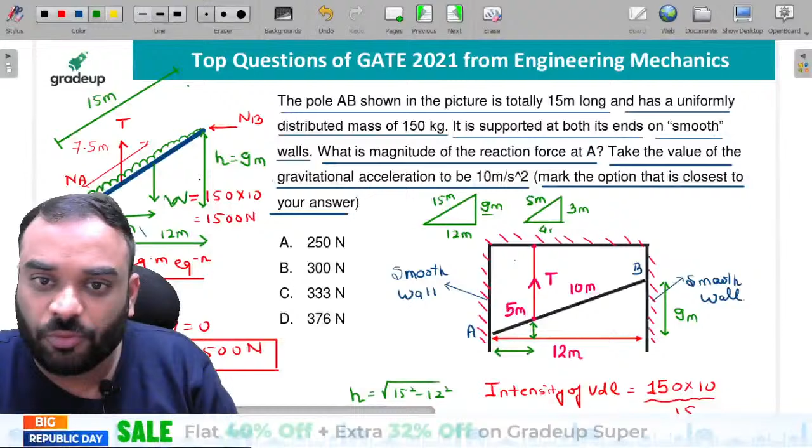If you divide all the values by 3, then you will get the value. Just divide this 15 meter by 3, so you will get 5 meter over here. If you divide this particular value by 3, then we will get 3 meter over here, and at this particular point we will get 4 meter. So it is nothing, this one is 3 meter and this one is 4 meter.

Now we know that this particular distance is equal to how much? This particular distance is equal to 4 meter, and this one is 3 meter.

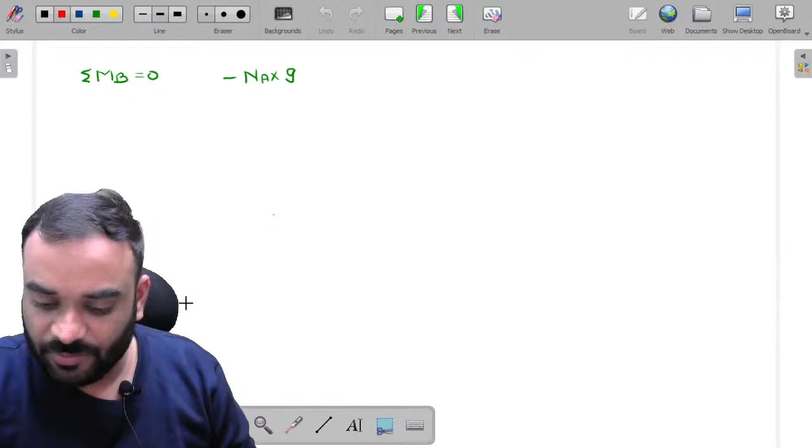Now let's write the equation of summation MB is equal to 0. Good evening Varsha, how are you? Come on in. Shashwat is saying it will be D. Let's see how it will be D, Shashwat.

So guys, we have to take the summation moment at B equal to 0, right? Summation moment at B is equal to 0. So NA into 9, then T into how much? We have to calculate this distance.

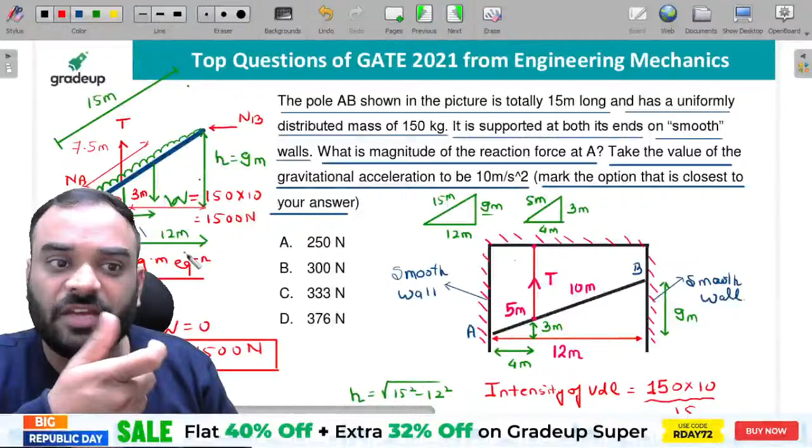This one is 4, and the total is 12, then remaining one is how much? It is 8 meter, guys. Your total distance is 12 meter, this one is 4 meter, so remaining is equal to 8 meters. So can I write it, guys? It is plus T into 8 meter minus.

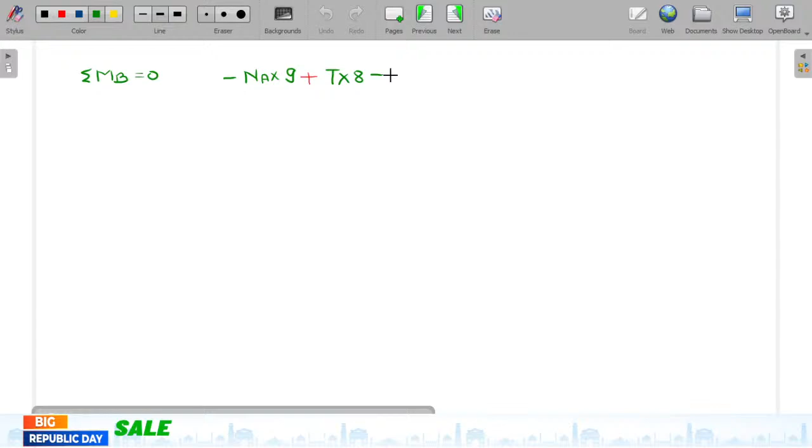Now your self weight of this particular rod is to be applied in the downward direction, and it is trying to move in anti-clockwise direction, guys. So this particular distance is equal to how much? It is exactly 6 meter in terms of horizontal, right? So can I write it, guys? T into 8 minus W into 6, and it should be equal to 0.

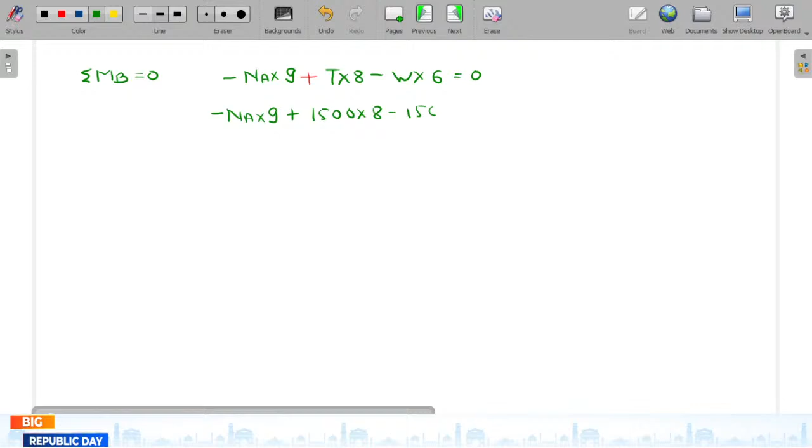So guys, can I write it? Minus of NA into 9 plus, what is the value of T? It is equal to 1500. So 1500 into 8 minus again 1500 into 6, and it's equal to how much? 0. So can I write it? NA is equal to how much, guys? Calculate NA, you will get the answer.

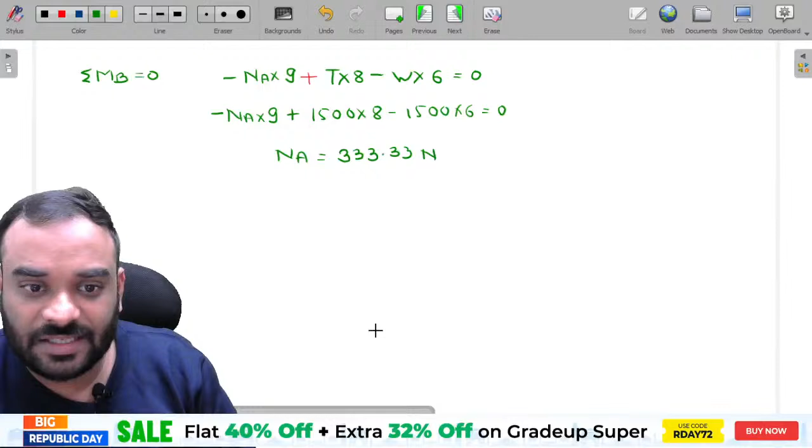So guys, we are getting a value of 333.33 Newton, and this is the answer, which is nothing but our normal reaction at support A. This reaction is found at A, so C is the correct answer, and it is a very beautiful question, guys. It may be asked in your GATE examination. It was a great question. Tell me, guys, yes or no?

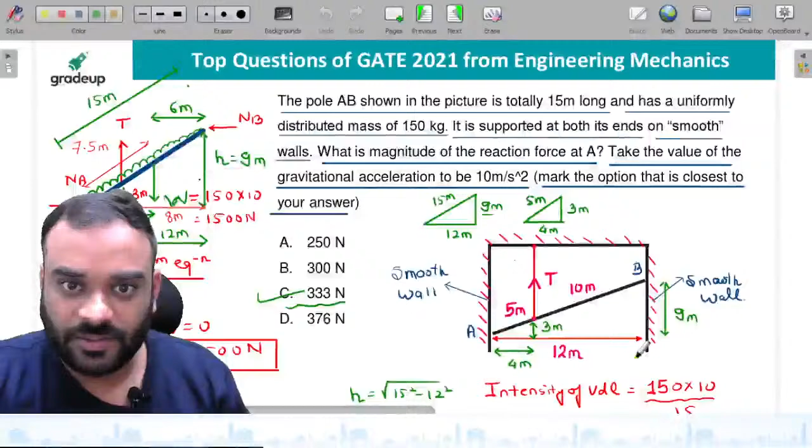Okay Shubhajit, wait a minute, let me show you, no problem guys. You can see here.

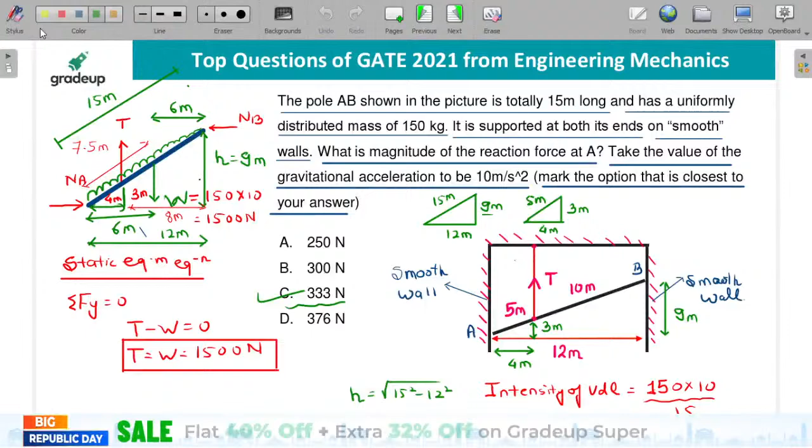This is the complete solution over here. Next page, this one.

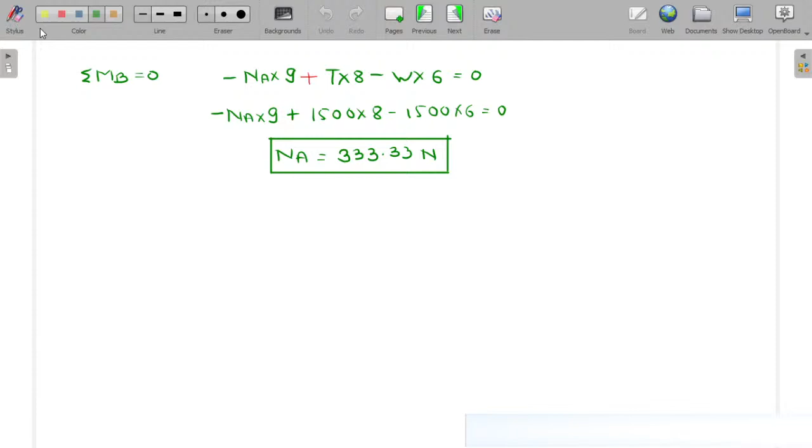Okay guys, so let's move to the next question. This is the next question which we have to solve. So it is given to us, guys.

This one is equal to how much? It is equal to 4 centimeter. What is given to us? It is equal to 4 centimeter, this one is 4 centimeter. And this is the hammer which is placed against this particular block to pull out this particular nail.

To pull out this particular nail which is embedded into this particular surface. Okay sir, now there is one force, guys, which is to be applied in this manner, which is 200, and the distance of this particular contact surface with this particular force is equal to 20 centimeter, and this distance is equal to 5 centimeter.

Now what they are asking, guys, is the tension in the nail, and you have to enter a numeric value in Newton. This is a very beautiful question which is a one liner question. It may be asked for 1 mark. So tell me the answer, guys, for this one.

Just solve it by yourself. I'm giving you sufficient time, guys, and it is a very, very beautiful question. Just try it.

And again, guys, this is nothing but your problem which is based on the static condition itself, and it is a numerical answer type problem. You have to just find the tension which is to be developed in the nail.

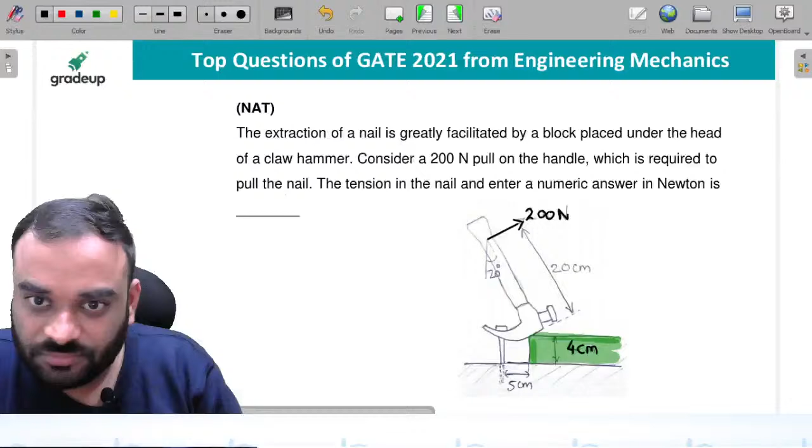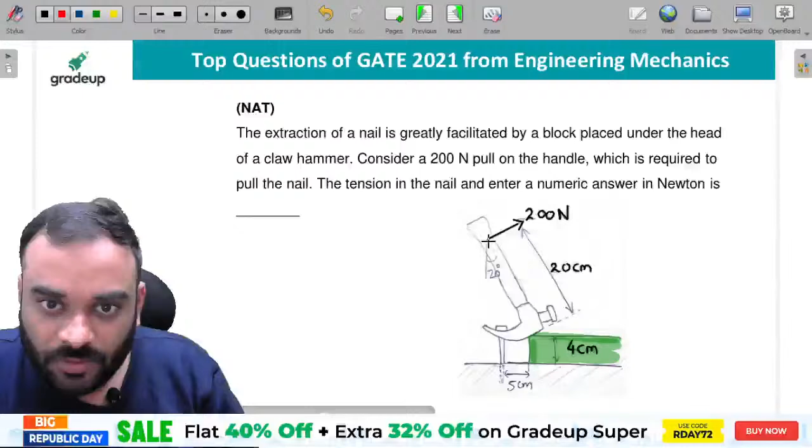It is 200 Newton. It is 200 Newton. This one is 20 centimeter. This particular angle with respect to this particular axis, this one axis, guys, this angle is 20 degree over here. How much is this angle? 20 degree. This one is equal to 20 degree.

Okay sir, now this particular distance is equal to 5 centimeter. How much is this? 5 centimeter. Now is it clear? Can you see it now?

So just solve it, guys, and tell me the answer, because it is a different kind of question which is based on the static condition. Just you have to apply the static equilibrium equation over here to answer this question.

Okay guys, now this is the figure in which we have to find out the tension force over here. Now you can see here guys, this is the tension which is applied in the downward direction, because you're trying to pull out this particular nail, so your nail is trying to give a tension force in the downward direction.

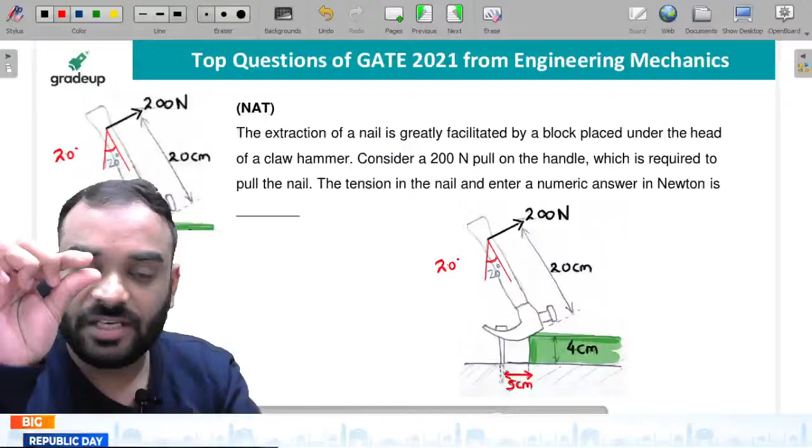Why is it so? Because of the friction which is present between the nail and the surface in which this particular nail is embedded. So guys, it is trying to give a tension force in the downward direction, because we are considering this nail and the hammer as a single object.

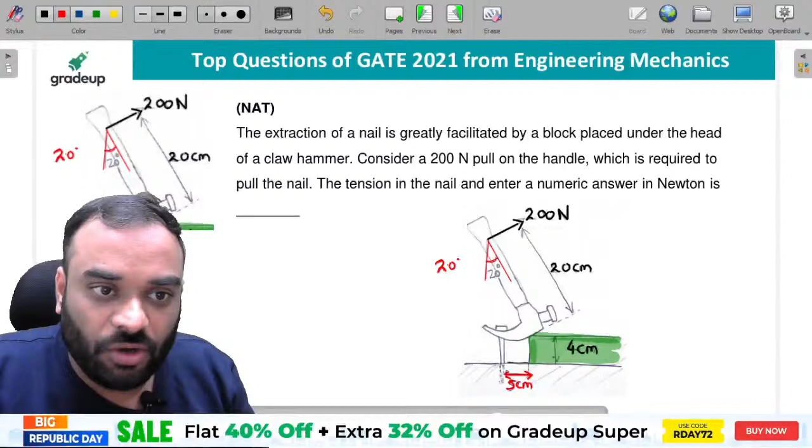Okay sir, so this one is what? This one is tension force guys. This one is tension force. And the distance of this particular force from this point of contact is equal to 5 centimeter.

Ye kitna distance hai baccha? This is equal to 5 centimeter. This one is equal to 5 centimeter. And this distance is equal to how much? 20 centimeter. Now guys, we can take the summation of moment about this point, which is nothing as, let us suppose this is our point A.

So can I say that, guys, the summation of moment about point A is equal to how much? It is equal to 0. So can I write it? It is 200 into 20, minus T into 5, and it is equal to how much?

0. Simple. So guys, what will be the value of tension force over here? T is equal to how much? So 200 into 20 divided by 5. We are getting a value of 800 Newton, which is to be the tension force present in the nail.

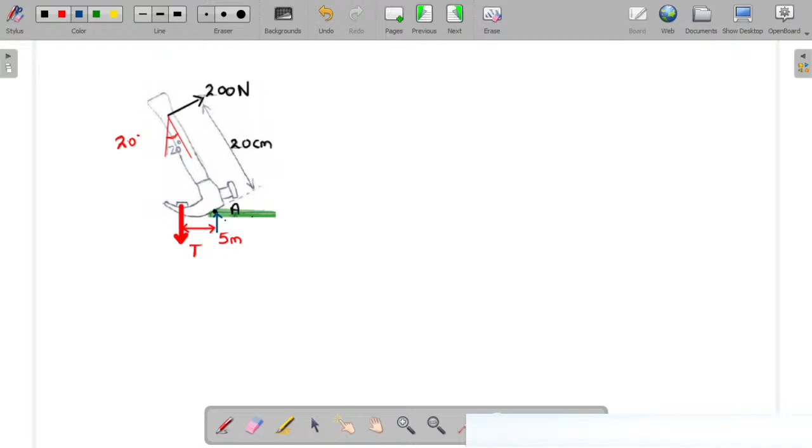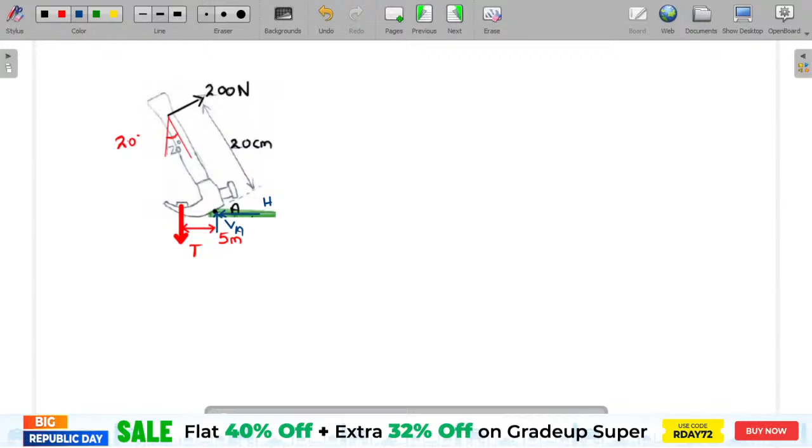Let us suppose this is your VA, this one is what, VA. And one more reaction is to be there which is in horizontal direction, and it is to be HA, this one is HA. Now as per the question, we have to find the resultant value over here guys, which is nothing as RA.

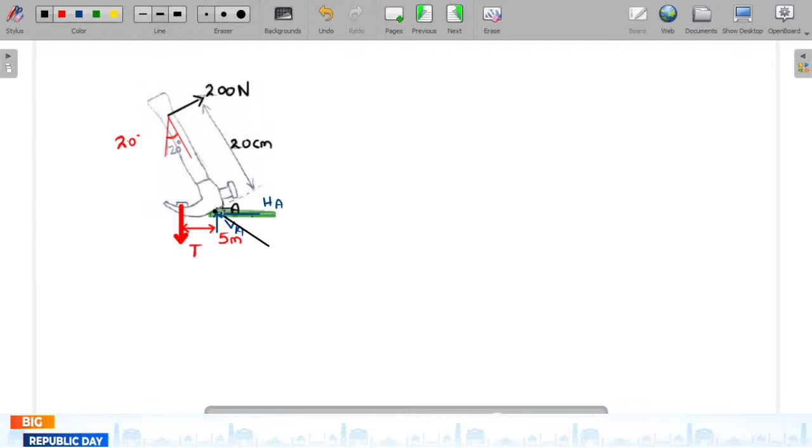Humein find kya karna hai ji? Humein RA find karna hai. This one, we have to find the RA over here. How we can find it?

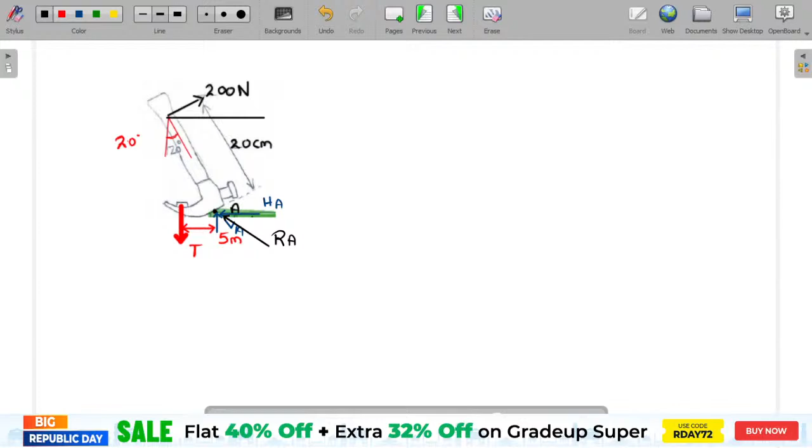It is very simple. You have to take the component of this particular 200 Newton in two directions, one is vertical and second one is horizontal. So guys, this particular angle is equal to how much? It is 20 degree. So remaining will be what? 70, and this one is again 20.

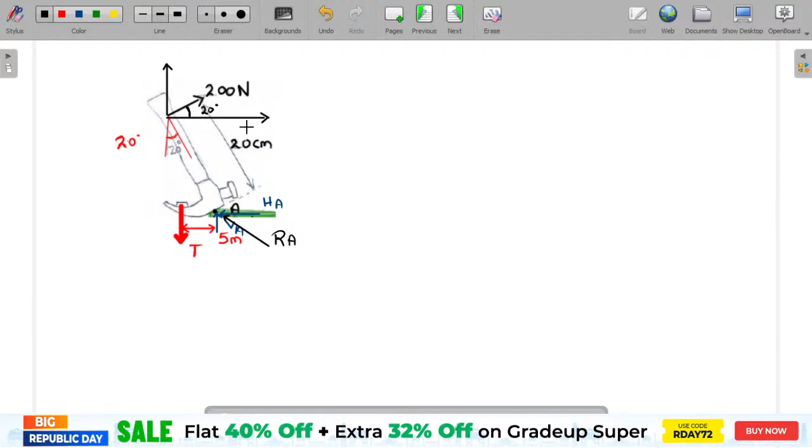So this particular angle is equal to 20 degrees. So can I say that this particular force is 200 cos 20 degree, and this one is equal to 200 sin 20 degree.

Now we have to take the summation of forces over here. Summation Fx is equal to 0. So plus 200 cos 20 degree minus HA is equal to 0.

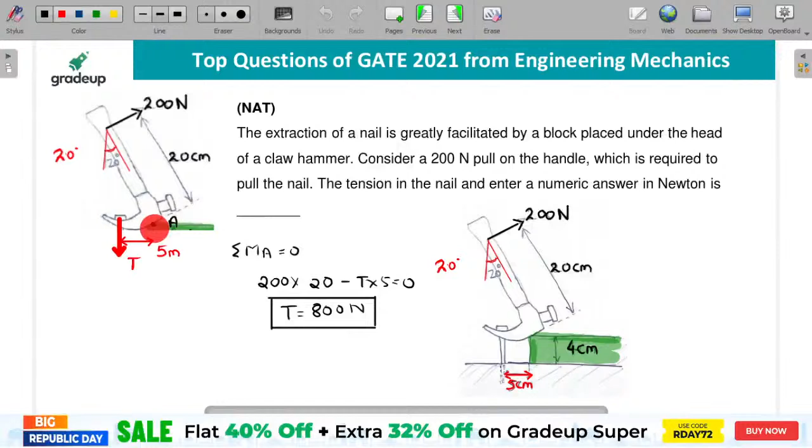So what is the value of HA over here? There will be no reaction due to support? No wait, there will be a reaction. You have two reactions over here in this case also, but they will not produce any moment with respect to point A. That's why I am not considering any reaction over here. But still we can take these two reactions, but they are not producing any moment with respect to point A because they are concurrent in nature. But while taking the summation Fx and summation Fy force, you have to consider the HA as well as VA over here.

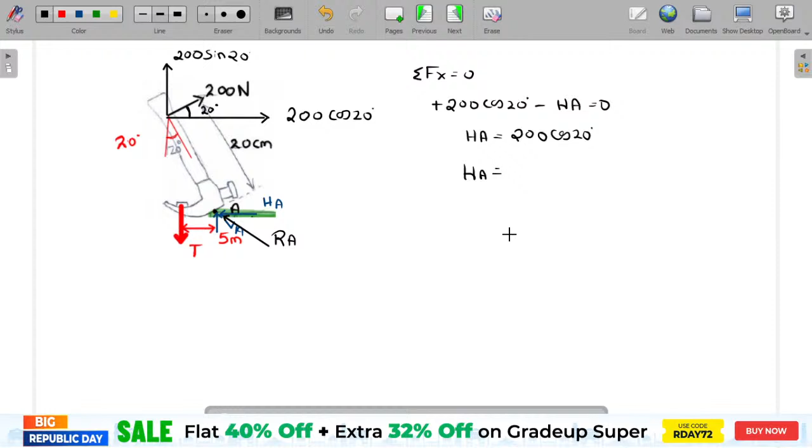HA is equal to 200 cos 20 degree. So just solve it to find out the value of HA over here. So we are getting a value of 187.93 Newton, and this is our HA.

Now let's find VA. Summation Fy is equal to 0. So 200 sin 20 degree plus VA minus T is equal to 0. So VA is equal to T minus 200 sin 20 degree.

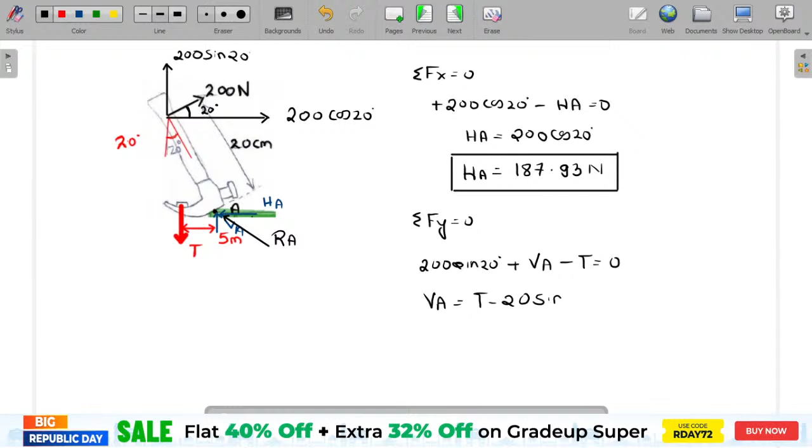So what is the value of T over here? It is equal to 800, we have already found it. And this one is equal to 200 sin 20. Just find the value of VA over here.

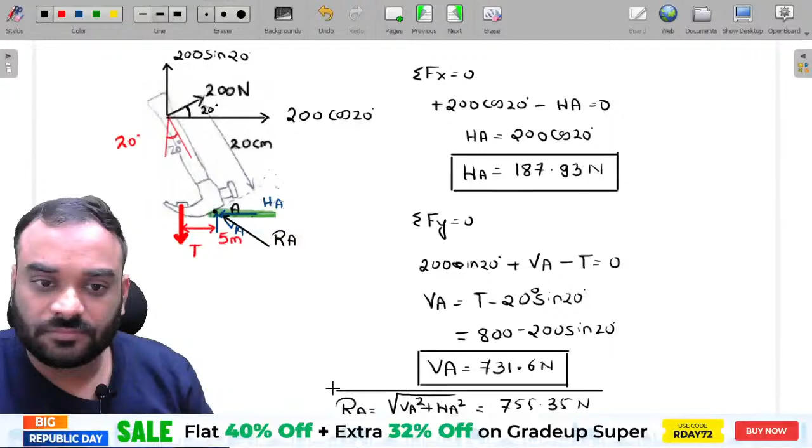This value is of RA, and this is the correct answer, 755.35. Now let's check it. 755. So which one is the correct answer? It is D. D is the correct answer over here, and this is the magnitude of force between the head of hammer and the block.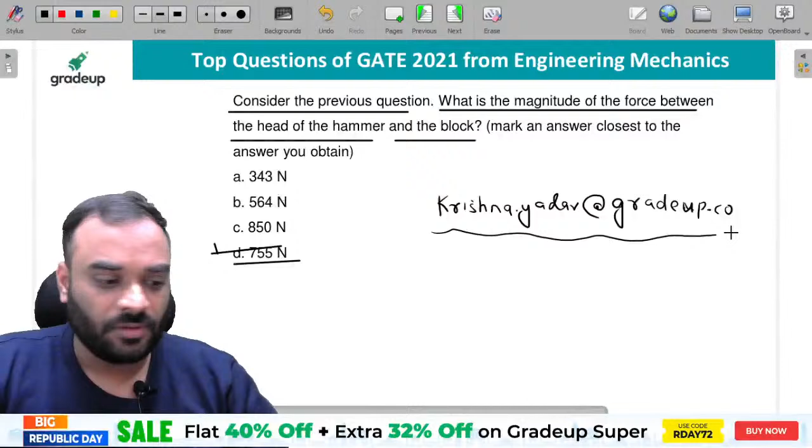Next question. This is an MSQ type question.

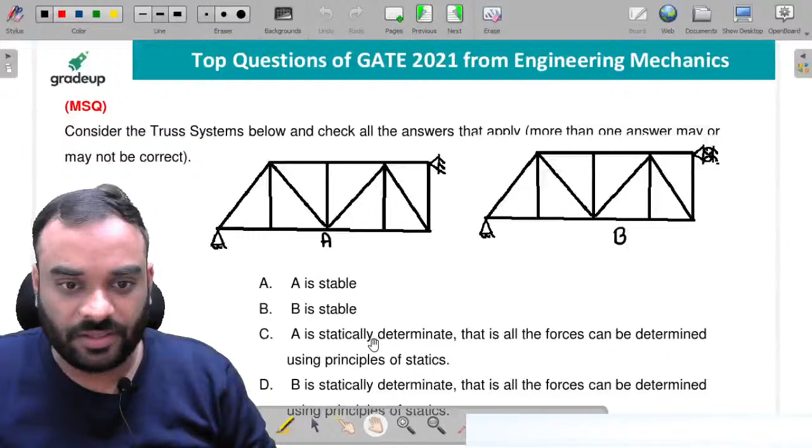Just try it, guys, and tell me the answer of this one. Again, it is a very good question. Let me show you the question in this manner. You'll see it a bit more properly, alright?

So tell me the answer of this one, guys. These are the two trusses in which this particular support is hinge. This one is hinge, this one is hinge, but this one is roller. This one is roller, okay. Shashwat is saying sir, it will be A and D.

Okay guys, so let's solve it. This is hinge support, guys, so we have two reactions over here, similarly two reactions over here. So guys, can I write it? What is DSE for this particular structure? DSE is equal to how much? 4 minus 3, that is equal to 1.

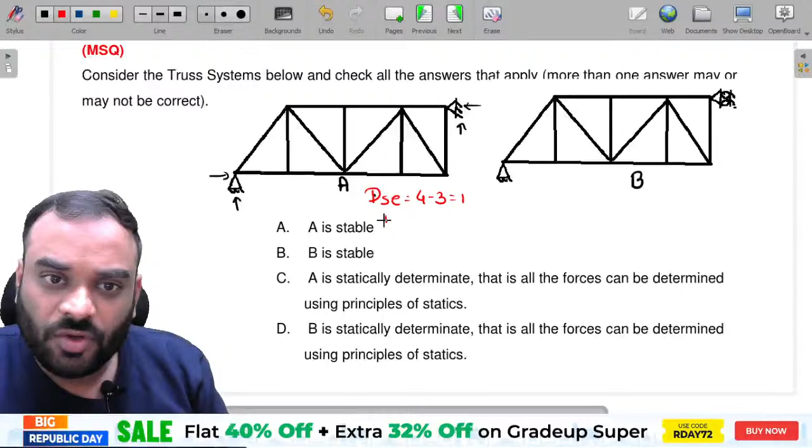What about DSI, guys? It is M minus 2J minus 3. So how many members are to be there? 1 through 15 - 15 members to be there. How many joints are to be there, guys? 1 through 9 - 9 joints to be there, minus 3.

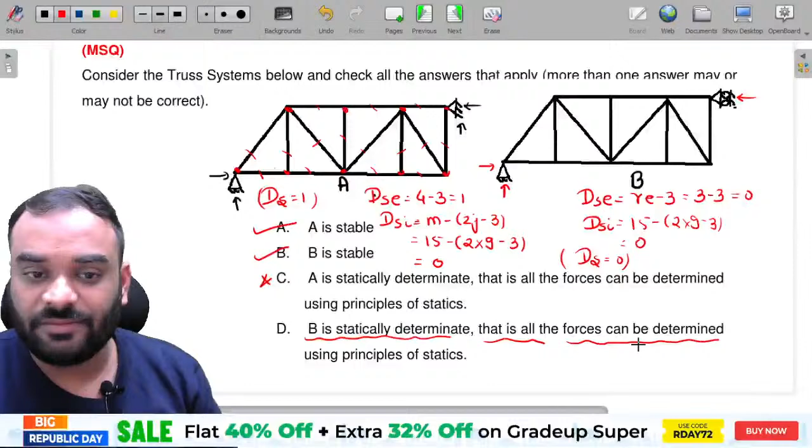Guys, definitely B is also a stable one. This particular truss is also stable. So B is also stable, and D is statically determinate - that is, all the forces can be determined by using the principle of statics. Yes, definitely, we can use the static equilibrium equations to find out all the forces present in the different members as well as the support reactions. So A, B, D are the correct answers.

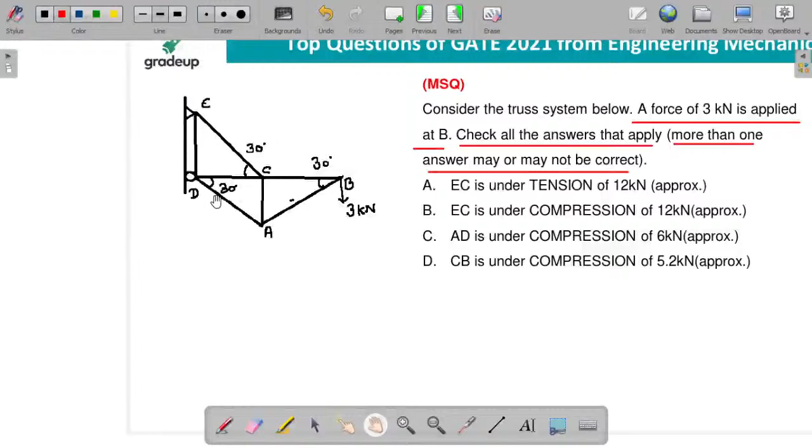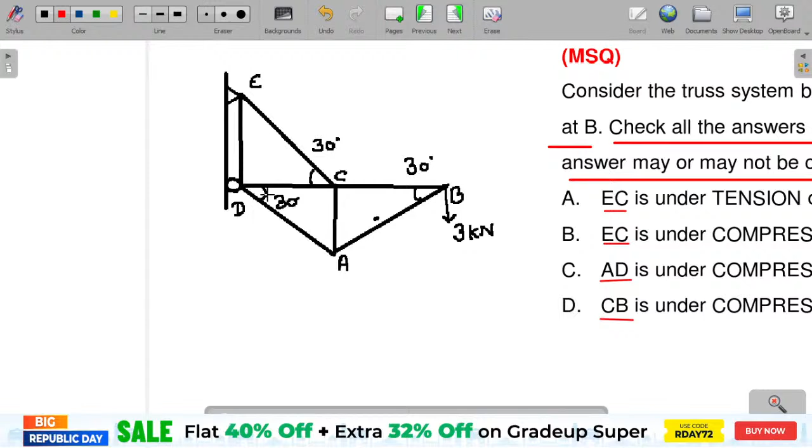This is the figure, guys. This is the figure, and you have to find the forces in EC, AD, and CB. So it means EC, AD, and CB - we have to find the forces over here. And this particular angle is given to us, guys, which is 30 degrees itself. This one is 30, this one is 30, this one is 30, and this particular load is 3 kilonewton over here. But guys, they have not mentioned any of the distance over here - no distance is mentioned at all. It is given in this manner only. You have to just consider the 30 degree angle over here, and this is the load which is 3 kilonewton, that's it. And you have to find the force in EC, AD, and CB. And this is an MSQ type question.

Again, a very good question, guys, in front of you. One more tremendous question in front of you.

Just solve it, guys. Quickly.

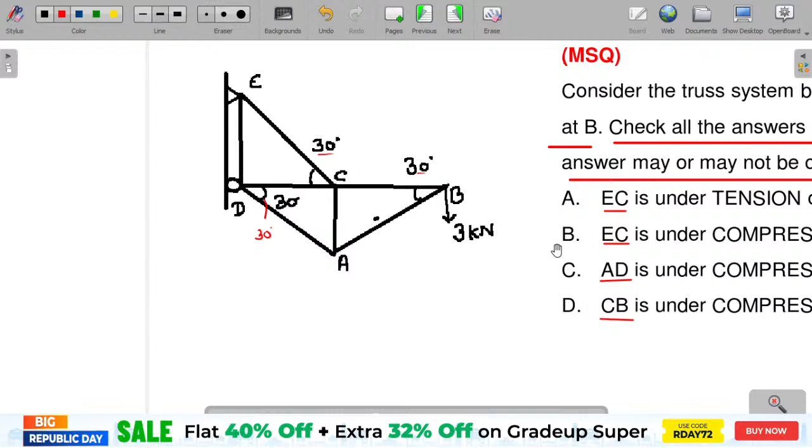Now, which concept do we have to use here? We have to find the force in members EC, AD, and CB. Generally, if we want to find forces in only a few members, we apply the method of section. But in this question, they have not mentioned any distance, and if you want to use the method of section, the distance is required to solve any member. So instead of method of section, you have to use method of joint here. Then only you are able to find the value of EC force, AD force, and CB force.

And it's a very good question. Generally we try to apply method of section to find out the forces in only a few members. But instead of method of section, you have to apply the method of joint here. Then only you are able to solve it.

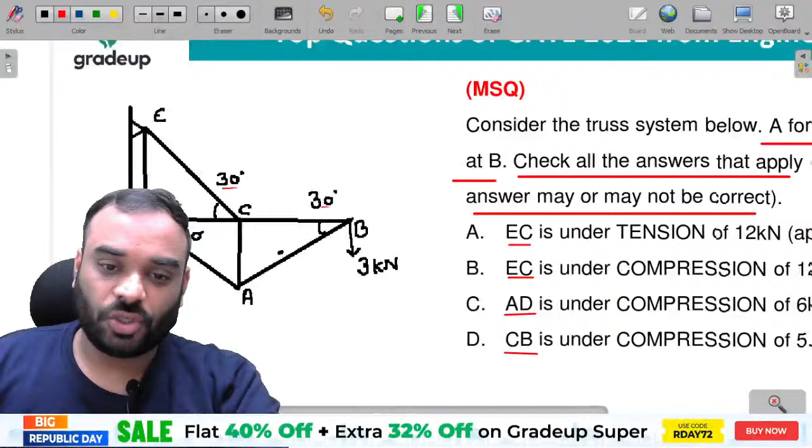Take joint B first and draw the FBD of joint B. So guys, at joint B, we can say that this is the force in this direction.

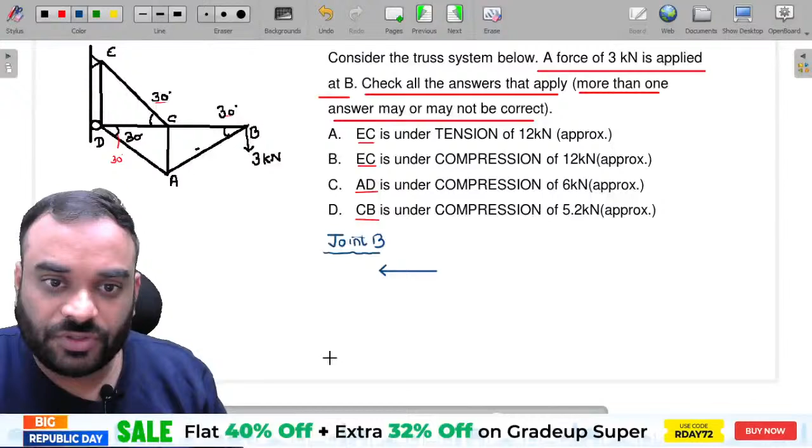Which is equal to how much? FBC. And this one is FAB. This one is a 30-degree angle, guys. And this particular external force, which is applied at joint B, is equal to 3 kilonewton. And this is our joint B.

So first we have to apply summation Fy is equal to 0. Can I write it: minus 3 minus FAB sine 30-degree is equal to 0. So, FAB sine 30-degree is equal to minus 3.

So, can I write it: FAB is equal to minus 6 kilonewton, and this is nothing but compressive. So FAB is compressive. Now let's find the value of FBC.

So we have to take summation Fx is equal to 0. So minus FBC minus FAB cos 30-degree is equal to 0. We have to find the value of FBC. So FBC is equal to minus FAB cos 30-degree. Just put the value of AB here. So minus minus will become plus, and cos 30 is equal to root 3 by 2. So we will get...

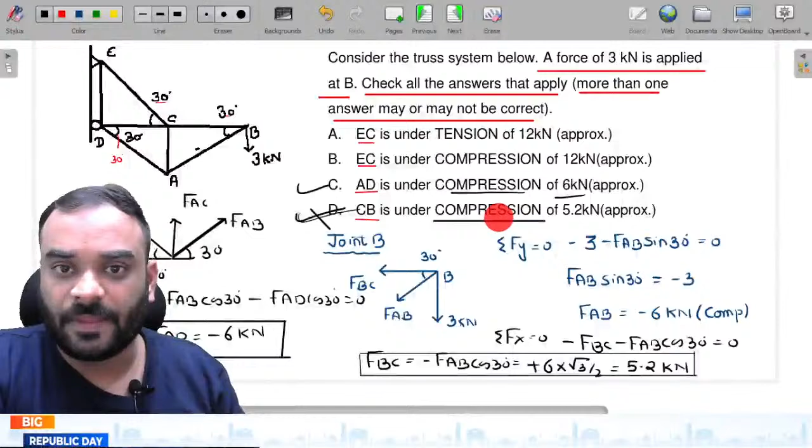This one is wrong, guys, because it is compression over here and we are getting tension over here. No doubt, definitely.

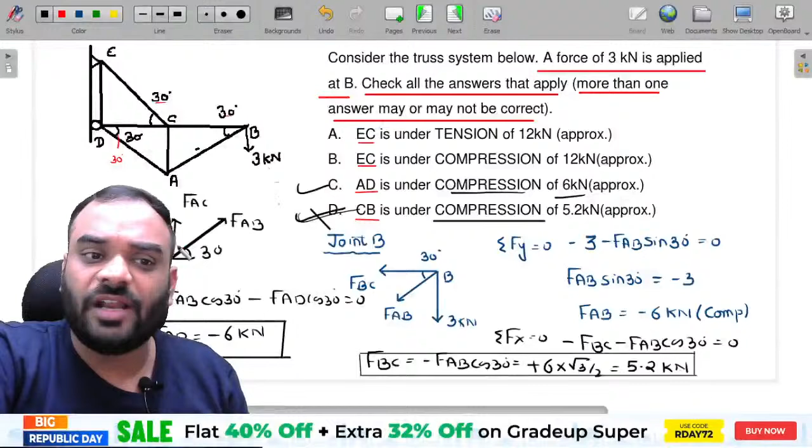Next, what about EC? So guys, if you want to find the EC value, you have to find the value of FAC first. Then you are able to find out the value of EC also. So let's find the value of FAC at joint A itself.

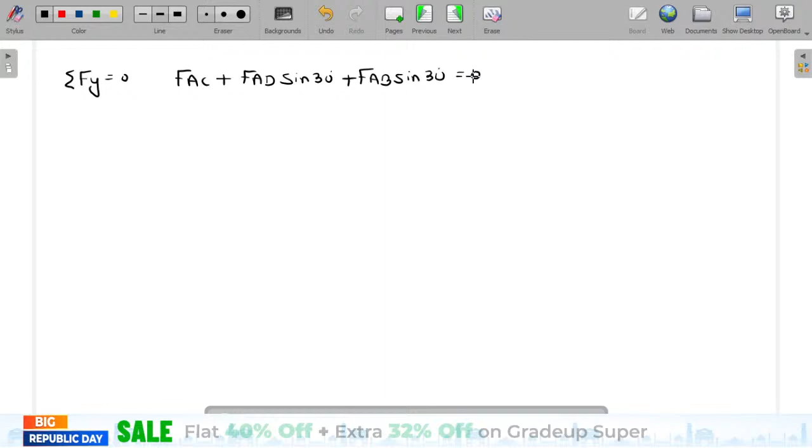So guys, can I write it? Summation Fy is equal to 0. So FAC plus FAD sin 30 plus FAB sin 30 is equal to how much? Zero. So can I say that FAC is equal to how much?

It is minus of 2 times. Can I write it 2 times? Yes, why guys? Because FAB and FAD both are same, these two are same. So can I write it, it is 2 times of FAD sine 30.

So minus 2, FAD is equal to how much? AD is minus 6, so minus 6 and sine 30 is 1 by 2. Cancel it, you will get plus 6 kilonewton as FAC. AC value came out to be plus 6 kilonewton.

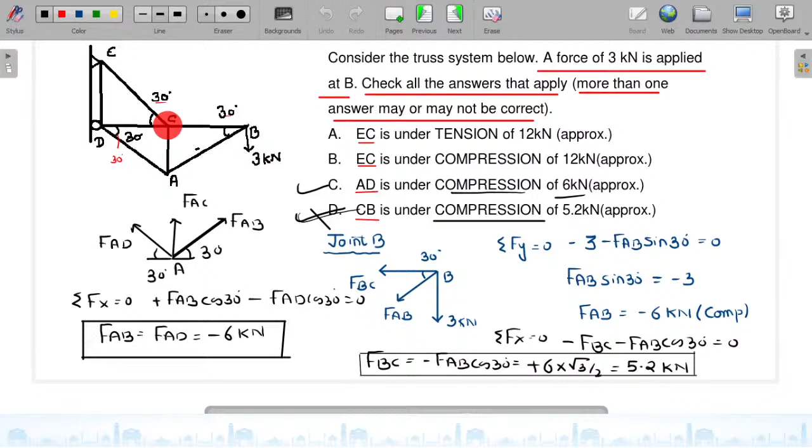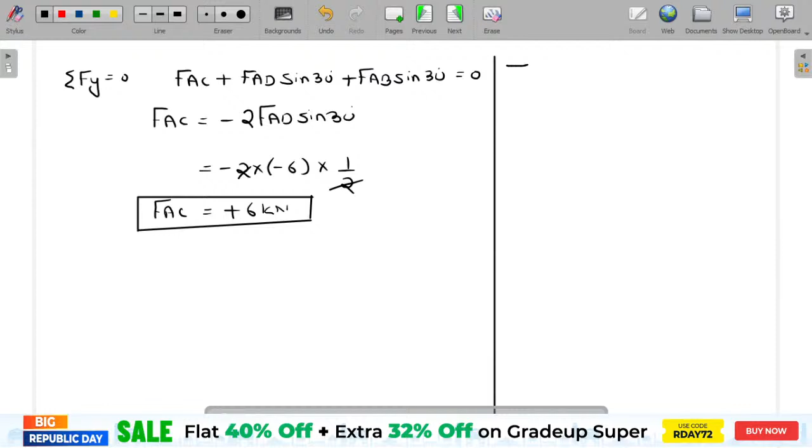Now guys, we have to solve the joint C over here. Let's solve joint C.

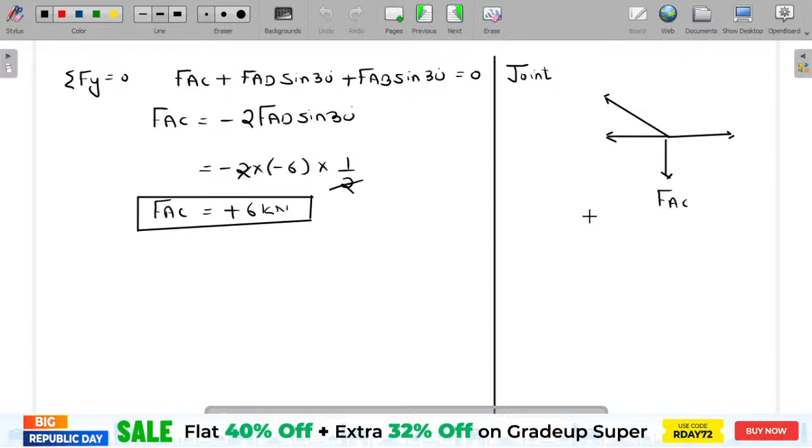This one is FAC, and this one is FEC, and this angle is 30 degree.

So guys, we have to take the summation of Fy over here to find out the value of FEC. So can I write it, summation Fy is equal to 0. So FEC sine 30 degree minus FAC is equal to 0. So it is very simple, guys, to calculate the EC value. FEC sine 30, it is 1 by 2, is equal to AC.

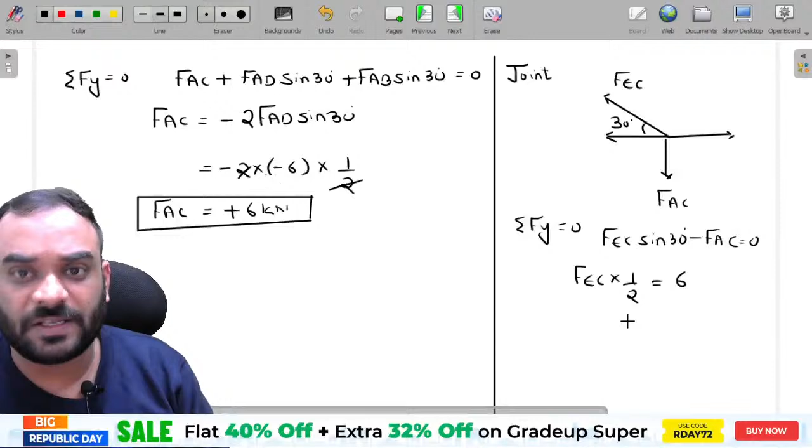AC is equal to how much? Plus 6. So can I write it, FEC is equal to how much? It is 12 kilonewton and it is positive, it means tensile over there. So EC is equal to 12.

So A, C are correct. B and D are wrong. A and C are correct, guys, B and D are wrong.

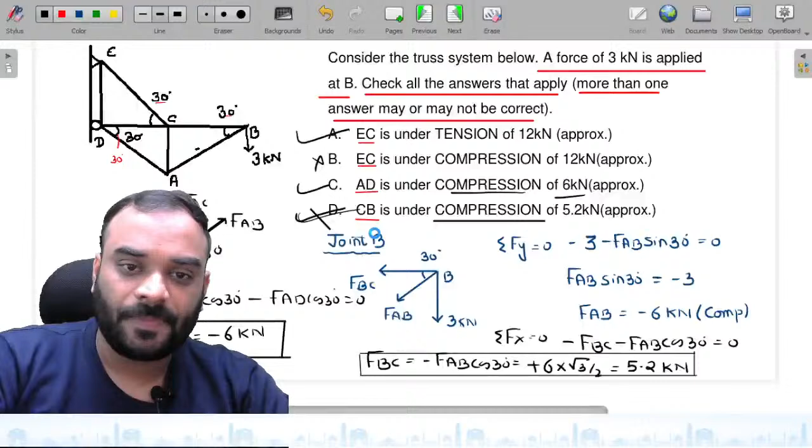Next question, guys. Again a beautiful question in front of you, which is based on center of gravity. And again it is a numerical answer type question, guys, we have to fill the value over here.

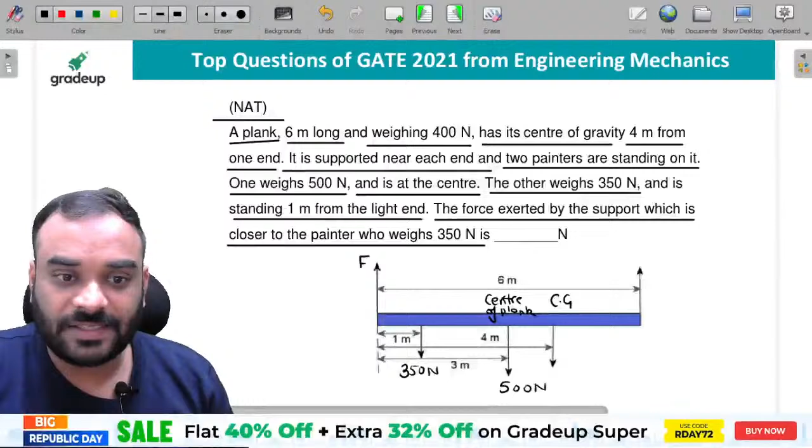So guys, how we can solve it? You know that the weight of plank is equal to 400, and the center of gravity for that particular plank is at a distance of 4 meter, and this one is equal to 400 Newton. So just you have to find this particular force which is near to the painter whose weight is equal to 350 Newton.

How can we solve it? Just take the summation of moment equal to 0. Summation of moment at this particular point - let us suppose this point is B and this point is A. So what will be the distances? We have to calculate it.

If we talk about the 350 force, its distance from joint B is equal to how much? This one is equal to 5 meter. What about 500 Newton? It is at the center, so this one is 3 meter. If we talk about this one, it is equal to 4 meter from there, so from here it is 2 meter. Okay, now let's solve it. You will get the answer.

He is exactly in the middle. Who? This 500 Newton is exactly in the middle itself.

So summation of moment at B is equal to how much? It is equal to 0. So can I write F into this one, which is 6 meter, minus 350 into this one, which is 5 meter, minus 500 Newton into 3, and minus 400 into 2, and it is equal to 0. So we can find the value of F over here. From here you will get the value of F. So it is equal to how much? Tell me guys.

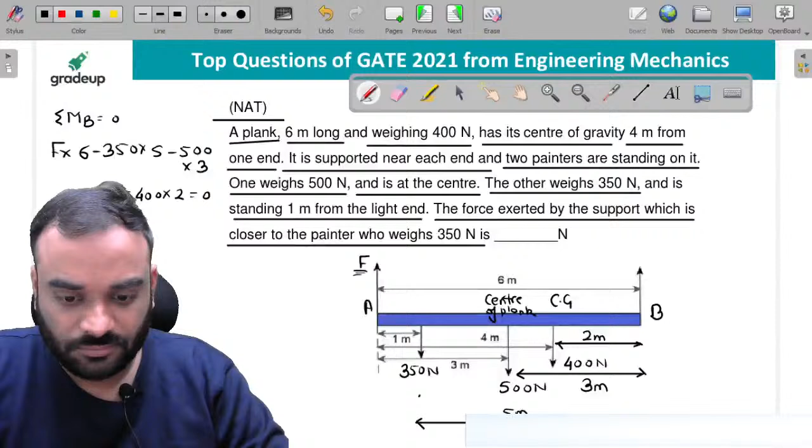We are getting a value of 675. Yes, 675 Newton, and this is the correct answer. 675 Newton. If we talk about this one, let us suppose this is F dash. So what is the value of F dash? Can you find it? It is very simple: 500 plus 400 plus 350 minus 675. So this one is equal to 575 Newton.

Clear? It is clear to all of you.